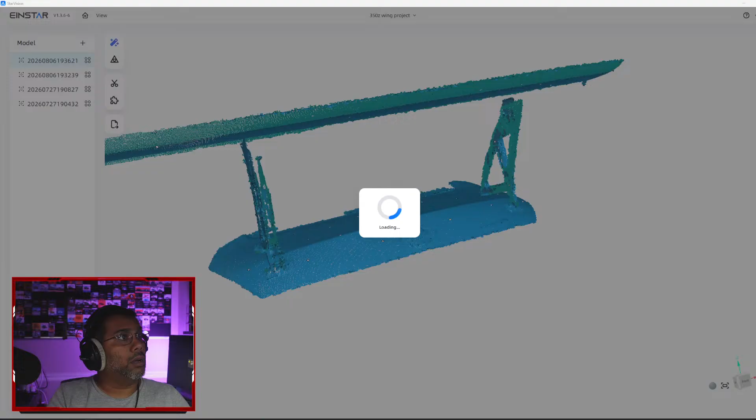I'm using a Wing Logic blade, so if you want to look that up in the meantime, let's see, Wing Logic, 71-inch blade for the 350. That's the blade I'll be using. And I did two of these scans in case one messed up. I don't really like this one because you see these double dots. Hopefully the software still took care of it well, and there's a shadow in here, but we'll see.

Let's just get rid of the parts we don't need right now. Totally messed that up, oh jeez. Last one is not good at the moment. Alright, let's clean all this up here. A little too deep, let's go back.

Jesus. Alright, nice and flat, there we go. Save that. I saw some cloud points on the corner there, I gotta drop that off.

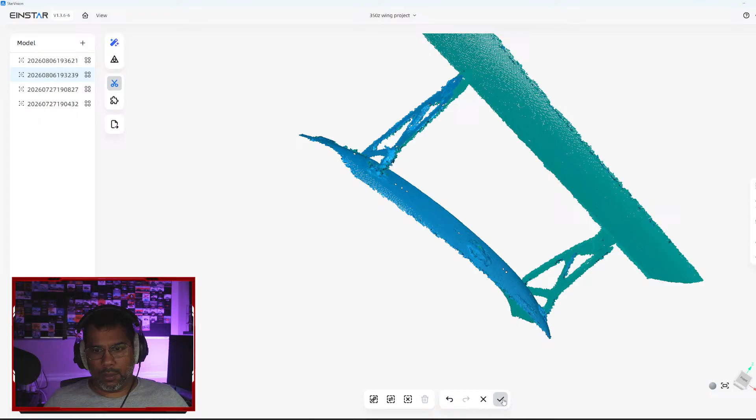Heck, I thought I got that thing from the bottom. I guess I didn't, oh the scrolling system in this, I gotta get accustomed to it. It's not like Fusion. Cut that out, cut that out. Let's save that.

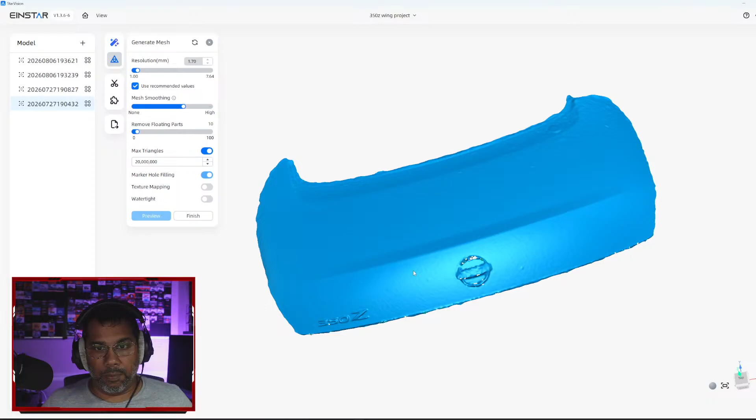Okay so this resolution, let's preview this. So what the scanner does is clouds and then from that you generate your mesh. So you see before it was very pixelated and holes and stuff like that. So now we have a little hatch, a little bit of geometry. I think we could fill some holes here. I mean, marker hole filling is there.

I think the processing is kind of dumb, actually. I really don't need that right now, so I don't care. Let's just finish this one and export it.

Let's preview. It's so much work, but that's the time you can take, so it definitely helps having you guys come hang out. There we go, here's under. That's not bad at all.

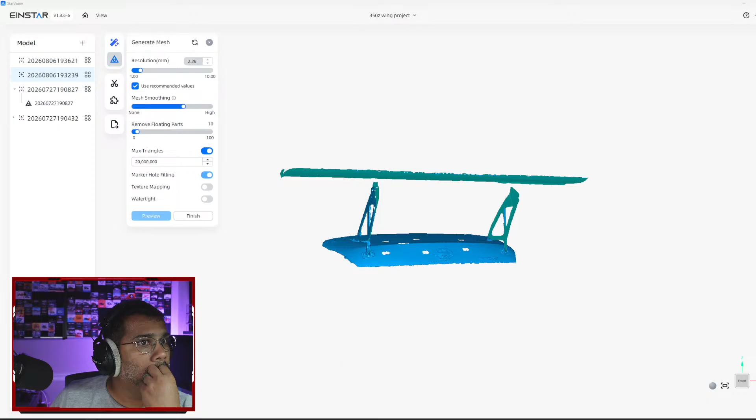We just need this really for the wing placement. So we have our other hatch that's clean, let's go ahead and finish that and export this guy also. This would be wing 1. Alright, let's export this one.

How's the drip? Have you done any events or anything yet?

You can see the scan messed up and skipped here. I just really want this for the placement of the wing, but I need to start processing these models inside of the scanner. This is kind of limited.

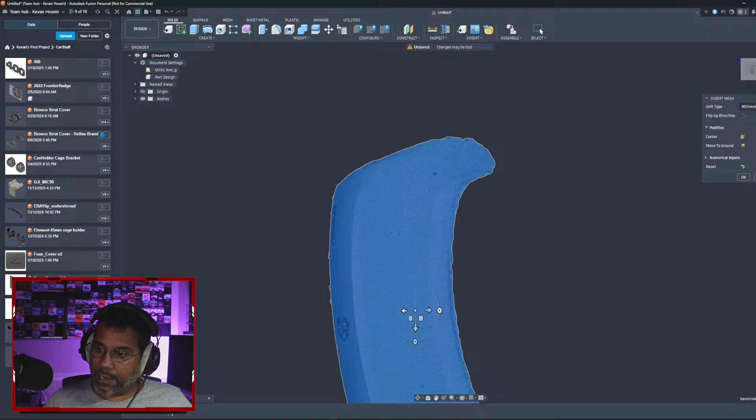Got someone on your ear. I heard the question but it lagged out a bit. Oh, you're outside, okay. Someone on my ear, what the heck, got me tripping on there. Is there somebody behind my ass?

No, I'm just asking if you went to your first event, your first drag event yet. Not drag, sorry, drift event.

Trying to get this oriented. It's gonna be a pain in the butt to get this nice and neat. Then we gotta roll this way. Okay, I think we'll just start with that for now, and then after we use some tools to get it.

So now we have a nice hatch, a nice scan, and we're gonna use this to design our pylons. Now let me get the underside and see. Oh, actually, no.

We're supposed to be able to align these two in here, right? Align, there we go, align this. It's not doing that. Do I need to select both of them?

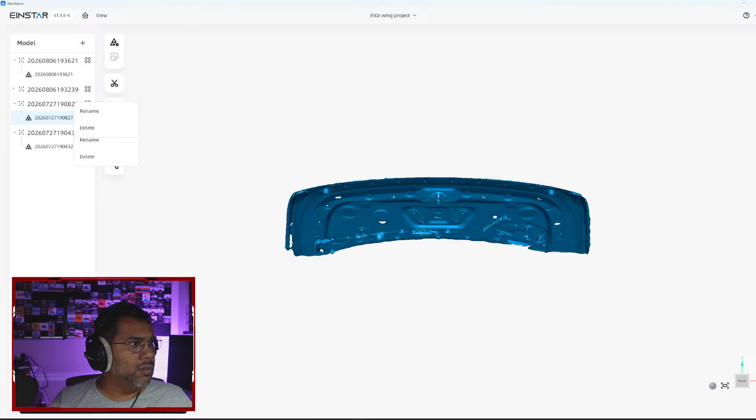Okay, open your workspace, load the two scan files into the model list. Select alignment, choose auto feature, let the software match overlap surfaces. Manual alignment.

Shift plus left click to pick at least 3. That's what I tried, shift left, it's only showing 2. Fudge, this overbearing thing, let's close and go back in.

Because I want to use the bottom geometry to actually create our bolt points for the wing, so I have to combine these two meshes. Right, but where is it going to let me?

That's balls, man. It said hold shift, but holding shift is not letting me select 2 models to align. What the junk?

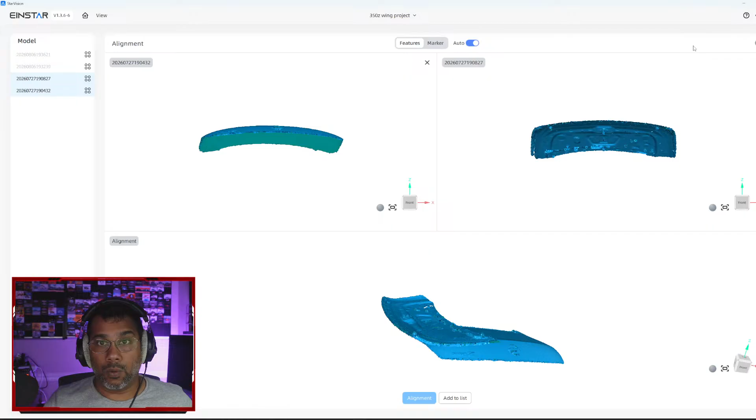Where the heck are you gonna make me undo? Okay, so we just unselect and reselect the 2 models. I may have to take off auto, and select 3 common points. Right now I'm just going through some woes. This is show 2 models, at least 3 common markers.

I wish that auto feature worked. Features. Select at least 3 common points. Do a right click, a center click, a left click, control click. There we go, shift click. So that corner there, that corner there.

Because this is the underside. Can I just do that there? And then on the top of the hatch, let's do here. Oh, nope, we gotta do... Can I remove that? Can't control Z that? Son of a bitch. 2. And then 3. Alignment. Fuck!

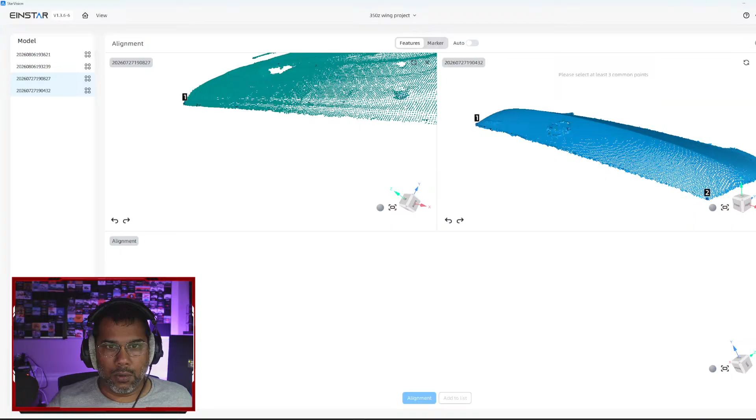Let's try this alignment again. So, see, this is underneath software. Corner 1, 1, 2, 2. Where would be a third point? Because we need to get it - the third point, we can't touch exactly.

Wait, no way, you're the oil funnel guy. What are you? Bro, you know I am. Are you talking about because I just... Yeah, because that stuff I could design from a sketch, a model. But this whole 3D scanning and retrofitting and making your own parts, man, it's a whole other beast, my dude. Whole other beast that I'm trying to figure out, you know?

Well, let's just do middle here. Then, yeah, the funnel stuff, I was able to do that. I've been 3D modeling that for years, and I'm able to do that. But this stuff is just so much.

Oh my gosh, see? So it's trying to merge the 2 points together where this underskin is much lower. Now the corner is pretty close, but you can see here where the 2 scans kind of merge into one. I think I'm just going to have to do this alignment in Fusion. Sucks. Shucks.

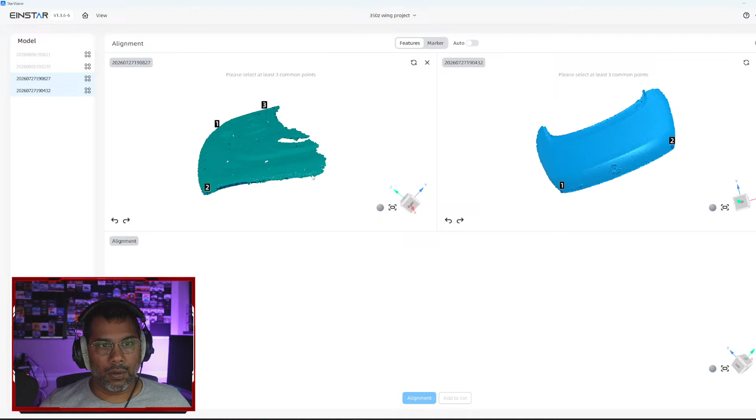Unless I have an idea. I have an idea, I have an idea. Let's see if it's big brain. So we go 1, 1, 2, 2, on the edge 3, 4. So edge around here, 3, 4. Please work.

It's closer, but we still have some overlapping, and the problem we're gonna have - see, yeah, this is underneath the skin, it's higher than the trunk lid. But oh, you're gonna be a pain in the butt.

You think so? I mean, what's sucky is that it's doing the cloud points instead of the generated mesh. Is it doing the mesh? No, it's doing the cloud points instead of the generated mesh. I would like to have it actually try to align the mesh instead of the cloud points.

Oh, on the other side of the hatch? Try to spray as much as possible, like in the scan. Let's just go into Fusion. So we have our hatch here. Let's insert and see if we just might have to do it in Fusion on the trunk. Yeah, we might just have to do it inside Fusion and align it that way.

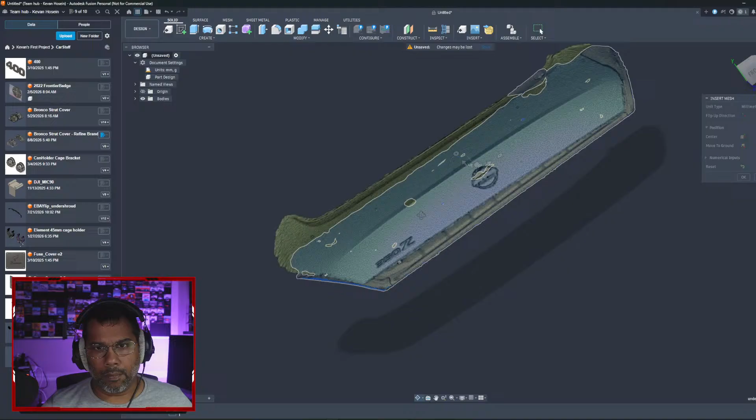Nope, that's too much. So, what software do you use for work? Just get it close and then we'll just try to snap, if that's even possible.

I mean, I think that's a lot better than where we were. Oh, where's the degrees? Too far. Let's go closer so we can move. Nope, it's snapping too damn much. Okay, okay. Let's just drop it there.

Yeah, Fusion seemed to be the way to try and get it done. Problem is, I think I should really first get the bigger trunk aligned by our coordinates. So this is the next... where's it at? MCARP, if you're still there, this is the next biggest hurdle, trying to get this.

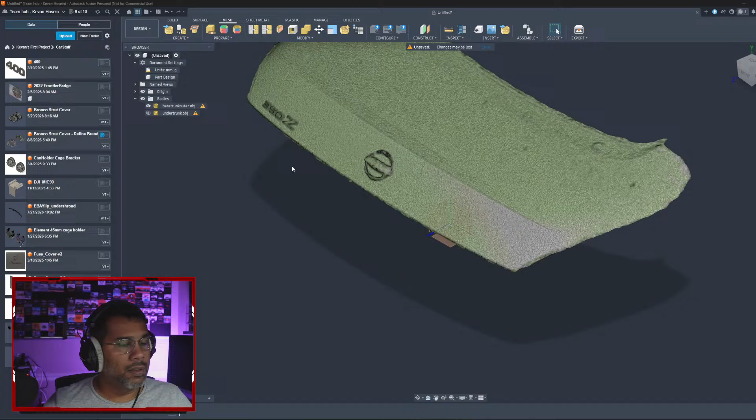Okay, so now how I'm going to try and get the hatch aligned to our coordinate system is we're going to have to create some planes. And not the flying kind. How do we do this again? We direct edit, select this body, and then we construct a plane from 3 points.

So let's try and find 3 nice points on here. In the middle, that corner there, that corner there. So that creates this plane.

And with this plane, we could go to align. Well, no, let's get some more planes. So that's the flat plane, so let's take this plane. Nope, not that style. And I want a perpendicular plane. So good. So now we have a perpendicular plane on the middle.

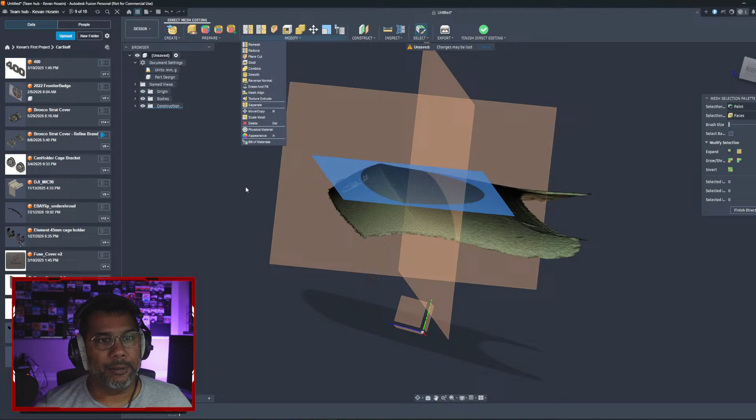Stepper 2 servo, man, I'm telling you, it's awesome. But when you start modeling it is a pain in the butt. It's like there's so much growing pain. And that's what I'm kind of going through right now. I could, like my last project. So let me show you all some stuff, do a little show and tell.

My last project is this, right? This is on my Bronco video. I had a friend that had a Bronco, and it's a Gen 1 body on a 6th gen chassis. And the 6th gen chassis has a huge strut tower, so it kind of protruded. Drift Pappy, don't look at my timeline. It is gross. You professional CADder, you.

So here is the scan. Let me hide the body. The actual design. What the hell is this coming from? Oh, up here. Damn. Okay. So we started with a scan.

I took the scan and I found, basically drew a matching, what you call it? Oh, man. So like, I did intersects and I kind of drew and traced. It's the big one, damn it. Oh, my timeline is so jacked right now. But anyway, I did like a cross section and I created a right angle to fit this. I'm just butchering it.

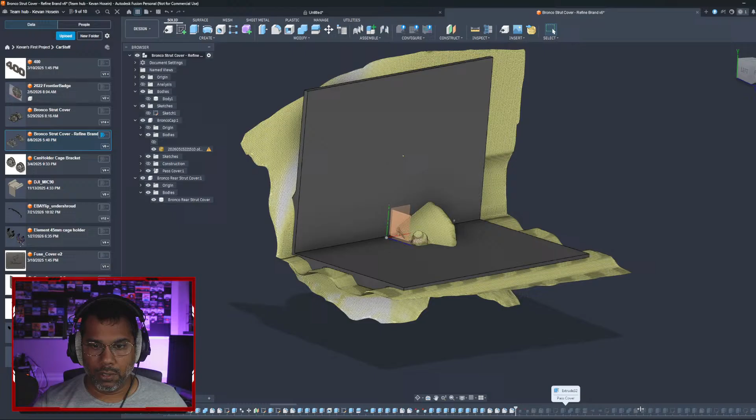Had it fast forward some more, blah, blah, blah. Come on, history. I guess it'll drag. Nothing too long. Drag. Jesus, this timeline is so messy. There's no other shapes. Oh my god, I went so far back. Went too far forward now.

So then the main body, I just did a plain shape like that. The inside was cut with a ball. I kind of skipped that. I'm butchering this. I'm butchering this. God damn it. Fine, not a good example.

But so out of simple bodies and simple objects, I was able to interact with each other and create different sections. So I created the section to actually interface with the physical scan. And then I created like a square block body to actually be the whole thing. And then on the inside, to create a relief for the strut tower, I created an egg shape. And then what I started to do was subtracting from each other. So I subtracted the egg shape from the wall, the L shape, and then from the block. And that gave me the relief I needed to clear the strut.

And then from there, I just started manipulating the body and stuff like that. So I was able to come up with this shape and printed it. It was like 20 hours to print the damn thing. Burn out with that timeline. Yes, the timeline is a damn mess. Holy shit.

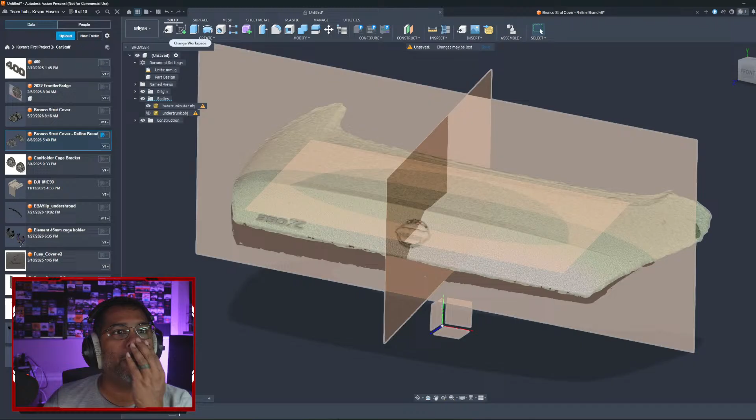An option in the menu. I'm forgetting it. Oh, there's always that gotcha. Right click. Up here, right click. There is some option I have to toggle. Oh, I think I have to create a component first, and then I think that's what it is.

Doing the Bronco project was a great learning experience. I guess I could show you the eBay shroud - the video I just put out on the shroud I did. This was a simple one, really easy, and this was the lip inside the bumper.

So I started with the lip. This is the inside of the bumper lip where you screw the plastic on the shroud to. And I needed to create the standoffs to bolt the CNC cut one-piece under shroud to. So I used this and I created sketches.

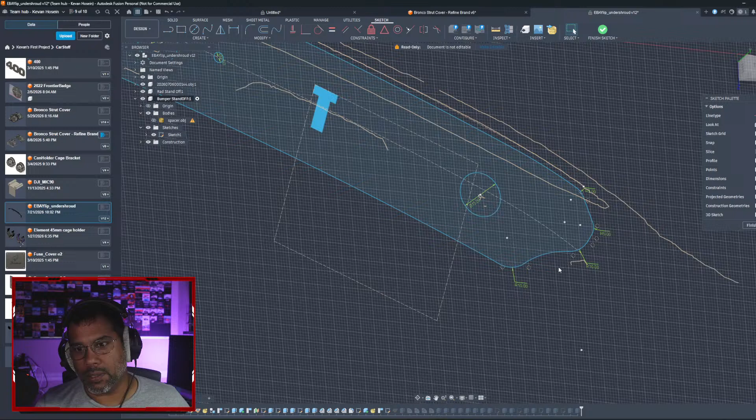And I broke them up into parts so it'll be easy to print and fit in the printer. After I was able to do that, I was able to extrude each sketch into the actual body itself. So each of these sketches I extruded into the body, and these gray parts actually were printed and became actual things. And you would see in my video that I actually used that for standoffs.

Do I have pictures? I think I have a picture I could just quickly drag and show you guys. I have no idea what I'm mumbling because this is the first time hearing this music. Where are you?

Oh yeah, but here's a photo while I'm digging through photos - the 3D part in the Bronco, and that's the hole that was there. And that's the console cover that I came up with. I know I have a picture somewhere of these standoffs. I guess you know it.

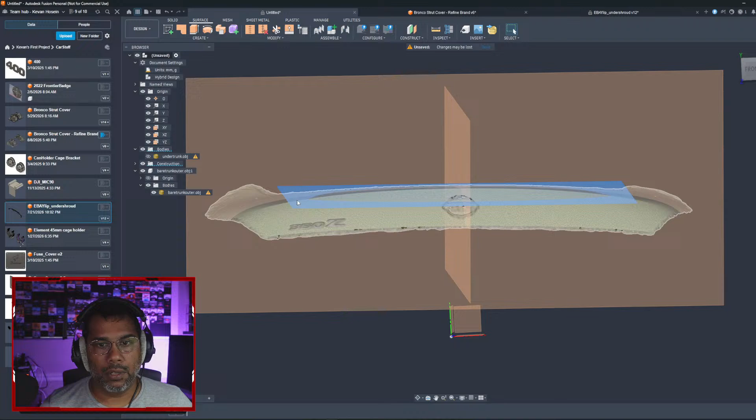I guess we have to do that origin in the component there. So it aligned. Dude, it freaking moved. Cancel. We have here - a line from here to here. No, we need this origin - not the original origin, this origin.

But it's only pulling down my planes I created. I've done this before, I just don't remember, and I don't know if I need to jump on that stupid YouTube. We don't need to ground from parent, we need to unground it. Okay, from scratch.

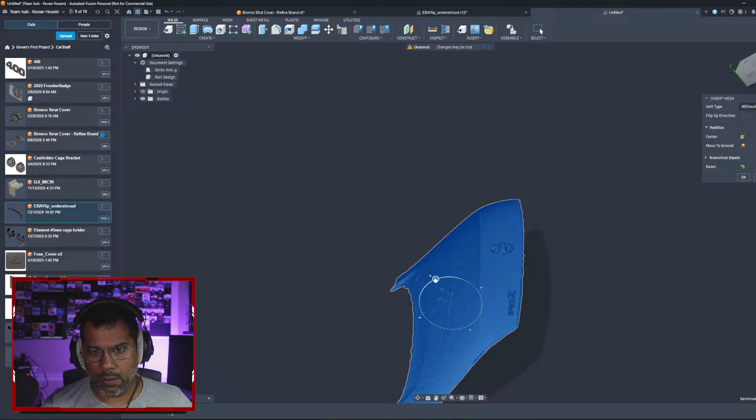I was thinking I needed to do this off camera and save you guys the pain, but we're all learning here - we're all learning to mess with meshes. We're messing with meshes. So top, we want that to be a little right there. Let's go back to top. We're gonna need to rotate him a little bit.

Sometimes if you zoom in more, you get a little more granular turn, but not in this case, apparently.

That came out beautifully. The Bronco thing, man, that was a rewarding project. Very rewarding. Every project I do, I kind of learn from it, and that was definitely one of them.

So we change this to hybrid, convert. Then we create our component from this body, right? Then we unground. Beautiful. Let's go to mesh. We direct edit the mesh. No, we don't do that. We want to create a plane after we do direct edit. 3 points, there we go.

Let's do here, here, here. So we want this to be our level. All right, so we have that one.

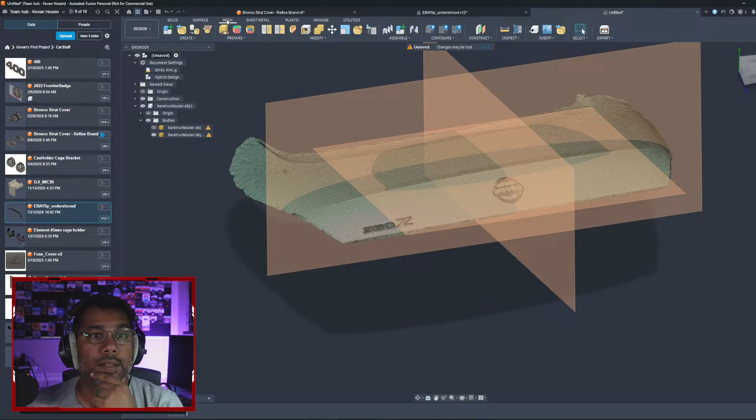Oh, so look, it created this secondary one that's edited. So now if we go back to solid, we go here, align there to...

There's something I'm missing. I'm sorry that I am making this annoying.

Let's see, what's my history? Where's my history? I need to find, there's some stupid freaking option that I am forgetting. 100%.

But like I say, guys, thanks for just joining on and struggling with me. Hopefully, if I could get into the actual designing phase, it would be a lot faster and smoother.

Just trying to figure out how to, because if I don't align these into the XYZ coordinates, my drawing and sketching will be really off. I need to get this hatch in a good position.

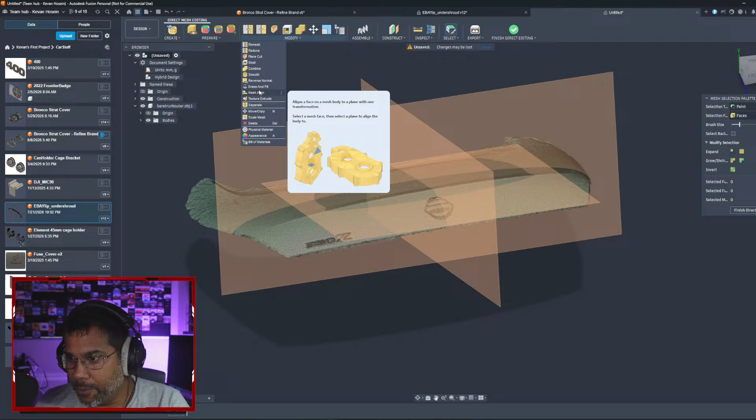You're enjoying the pain. I love it. I'm just freaking cold sweating here right now with performance anxiety trying to do this in front of y'all.

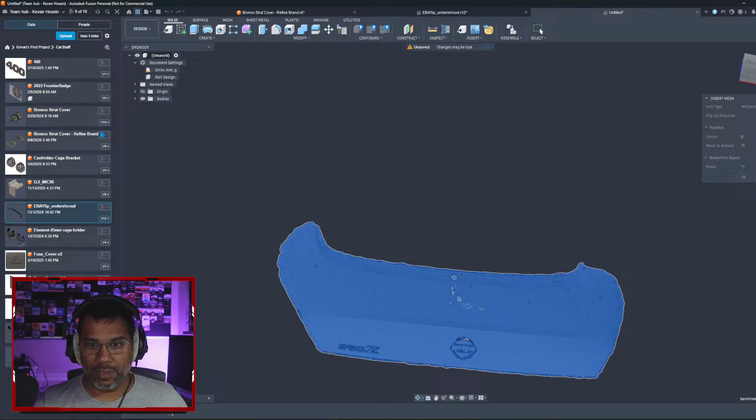Oh jeez, oh jeez, the performance anxiety. Definitely, yeah. I can't believe I forgot to hit the radio button to select it because it was just moving the parts for that. Golly.

Where's that? Yeah, here it is. So you want a 90. And go real close and rotate it a little bit. I mean, we don't really have to do this if we're going to align the damn thing.

Okay, so now we have our body. We need to change to hybrid so we could create our components. Now we create a whole new component for this guy, and we select the radio button to work within this component. Then we go to direct edit. Kind of get all top there. Oh, now we pick our points.

No, let's try 3 different other places. Let's do the middle of the hatch here. Okay, and we have our first point. 3 points. No, perpendicular point.

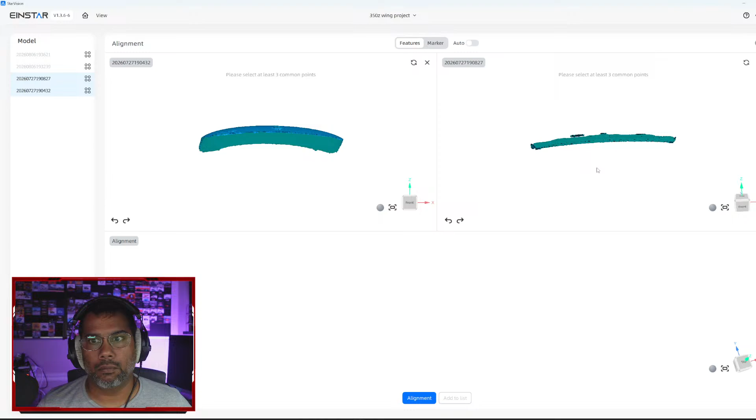That might actually be helpful, because we tried to mess with our alignment here too, because I want to combine 2 meshes, this and these 2, but that's a whole other story, I guess.

Why? Come on, this has to be how to do it now. No alignment suggested by geometry could be found. What are you talking about? We don't have any bodies. It's just this, I swear I've done this before. It doesn't want to work. Why? Why? Just banging my head.

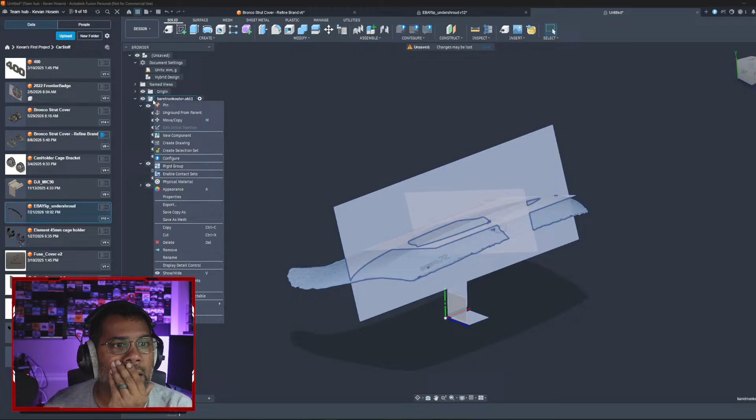Oh, I'm grounded. Unground from parent.

I pulled a muscle, I pulled a muscle. I pulled a muscle, oof. But we did it, we did it boys. We did it boys, we did it boys. Jesus Christ.

Oh shit, that was a pain in the ass. Okay, I need to see. Where's the origin? Okay, so we have flat there.

Now we need to align this vertical vertex to this here. Alright, so now modify, align, and we come to, it's right here, it's very faint. There, alright, so now that should be lined that way. And then we align this portion.

Okay, this one guys, I'm uncertain about, right? So this is capture or revert positions. I don't think we should revert, we should capture, right? Because we're moving stuff. So we capture the position.

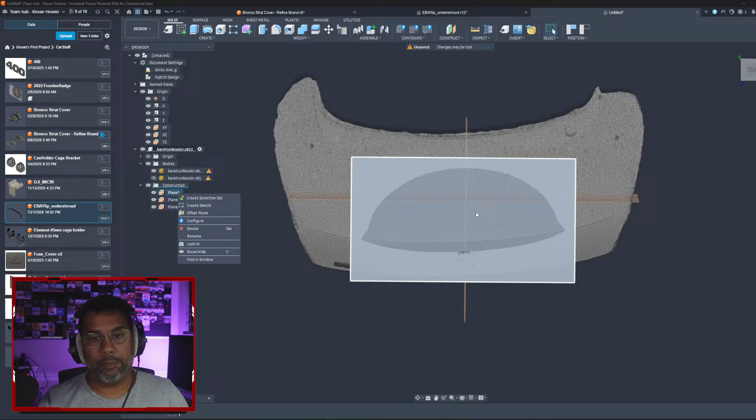Right, so eventually I am going to do scan, CAD, send, and send them the pylon design, the swan neck pylon design. But I want to create a fat, thick base plate, because some base plates with the downforce of the wing, it actually deforms the hatch. So that's why I'm going through all this pain in the buttery to create a nice flat base, wing plate base.

But yes, it's very pain in the butt. I mean, I'm sure after I do it so many times, fucking A, after I do it so many times I am going to be able to do it a lot faster. Because everything's like growing pains, you know?

I might have to do that cloud. I need to write it down. Cloud compare.

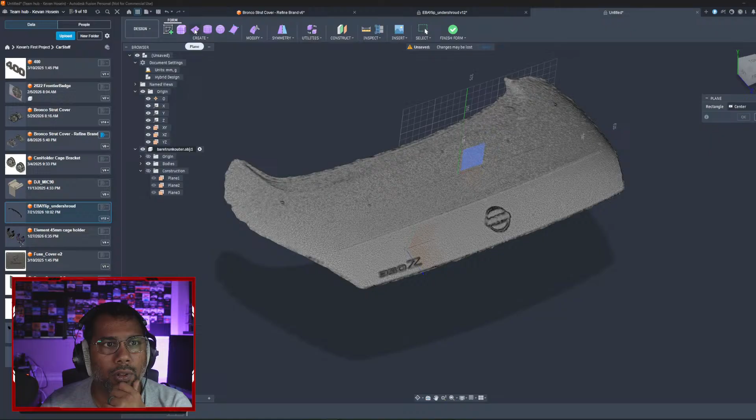I don't want one off of a plane. I want one off of a face. Edge. Object snap.

Okay, I'll go back. Let me go back. Finish form, so like here, right? Edit feature. Now I'll just edit in the feature.

Yeah, I don't know if the free version will let you do it. It just gives me this. Forms is the worst, I mean, you gotta get it right. Let's go back into forms.

Gosh, just give me a damn protractor and my old trusty DigiKey ruler and a caliper. Good lord, why do we torture ourselves like this?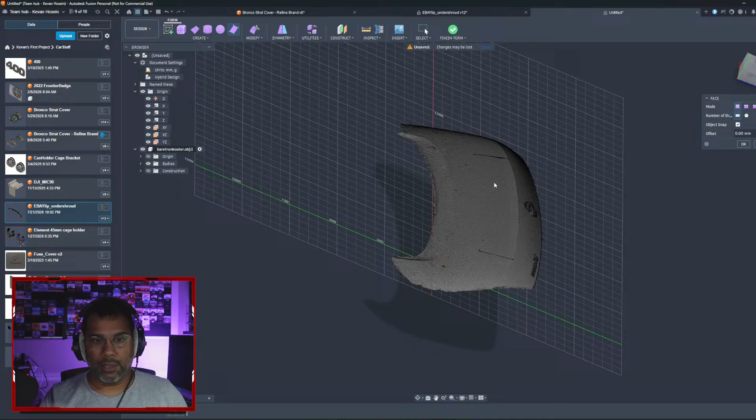So now we have our first form. And modify, let's subdivide it. See, object snap. This point? No, you have to just subdivide it first. Okay.

So now, I think it's Control or Shift. Oh, right click. And we move. See? No, we just want to move. We don't want to move the whole body.

We want to move. Is it Shift or is it Control? There we go, move that point. Why did you?

You want to select the form, select a point. Edit form. Edit form. Ah! Boing, boing, boing, boing.

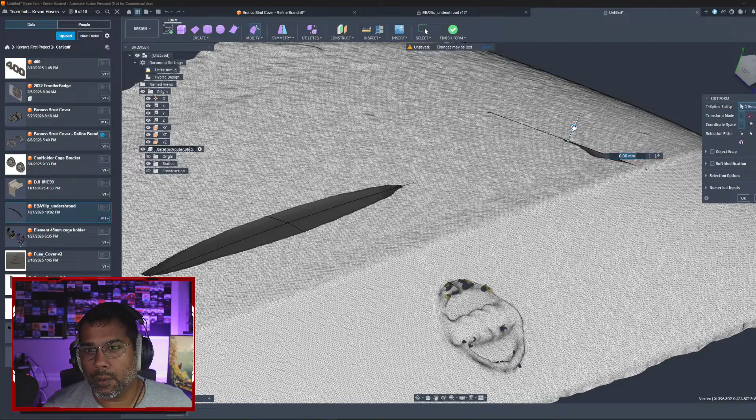This is what I want. It's a little too high, so let's just drop it down a little bit on the body. Yeah.

This corner here, edit form. Nice. So we will pull it down a little bit and define it more. Nice.

Okay, so now we want a subdivide. No. Want just a subdivide here. Okay, and then here we want another subdivision.

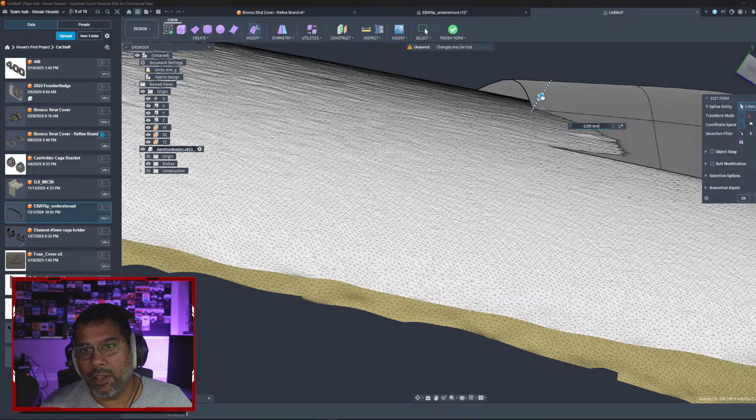No more subdivide, I want to edit form. All right, okay, this guy, edit form. I may have to subdivide again because you see that shallow point. But slow but steady, guys, slow but steady.

It's fun when it starts to work out. But when you're in the struggle bus and you have people watching you struggle, it's a pain in the arse.

But this is awesome, and we're actually making progress now. Getting the actual skin off the trunk. Because the underside is really there, so I will know where I want to drill. Because the underside of the hatch, I want to make sure I drill and place my bolts and washers into a very strong spot.

Okay, yeah, we definitely have to create more subdivided parts. It's so time consuming. Let's get here down. Just do this a little faster for you guys.

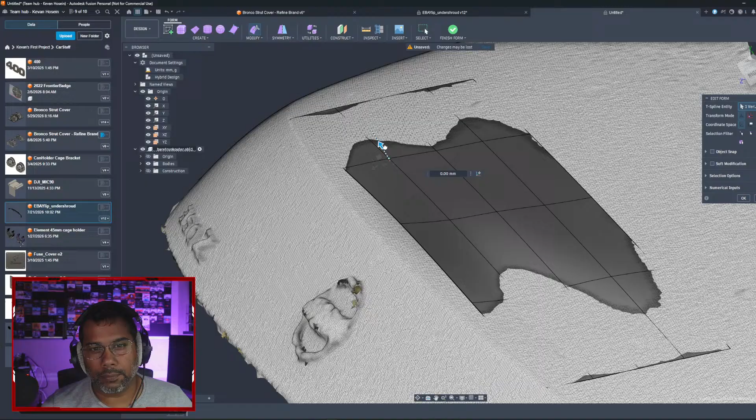All right, let's hit OK here, grab these parts of the form, and add a subdivision here. I don't want it lengthways, so nope, I want it that way, but I don't want these. Yep, there we go.

Should be able to right click and choose repeat, right guys? Repeat subdivision. Oh yeah, but it didn't really take the menu. So there, snap-a-doo-doo, doo-doo-doo. Now we go back to edit form.

Let's do this point. Oh, you know what? Freaking object snap this bad boy. Beautiful. Object snap, ah, I forgot all about that option, guys. Look at that. Oh, and now it's snapping towards the mesh.

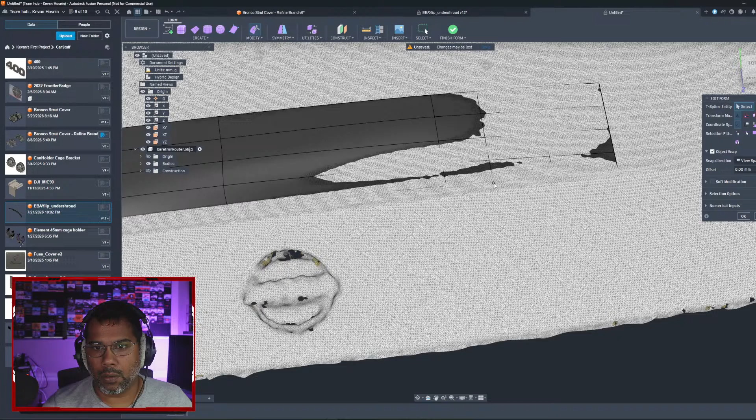I have to do a little flip on the end at where the trunk naturally kind of tapers up. I think I need to subdivide these sections just a little more. Yep, like that. Yep.

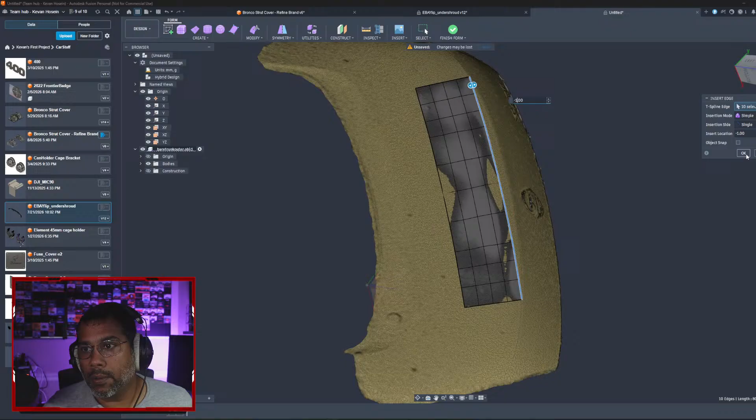I mean, that's what, 1 millimeter? Can we do minus 1 millimeter? We cannot. There's a way to drag the edge, isn't there? I mean, there was a way, man. Just drag it yourself.

There's an option somewhere. Single, simple, just try exact. No, it wouldn't let me do it, out of extend. Why won't you let me extend? I mean, I'm not trying to go that far back.

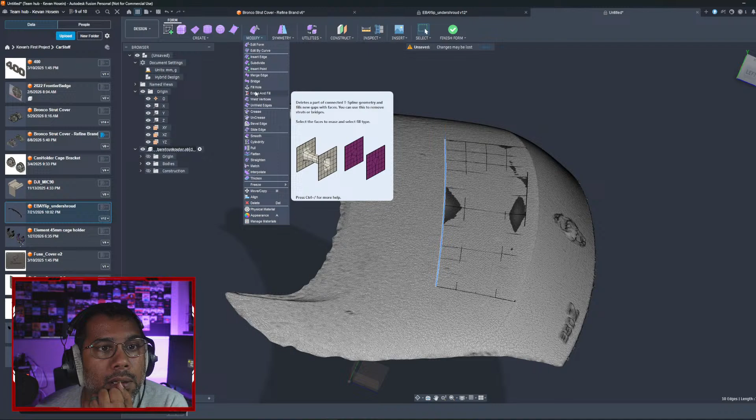Uncrease, unweld, bridge, merge edge, aligns the edge to second edge. Pull. Is it pull?

Just edit the form, so we want to edit the whole form. Take off object snap. Hold Alt and drag. Nope. Shift drag. Nope. Alt drag. Oh, click the edge. Right click.

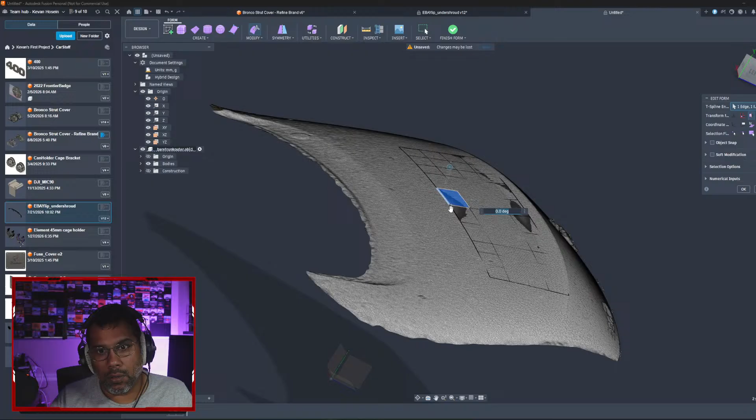That's what I was trying to believe. Alt. It's not doing it. It's not doing it. So we just edit form. Yeah, that's what I'm trying to do. I'm holding Alt to drag, but it's being...

Because that's like what I saw him do. He double clicked. Edit form. Hold Alt. Drag. No. Soft modification is just that. Alt and drag.

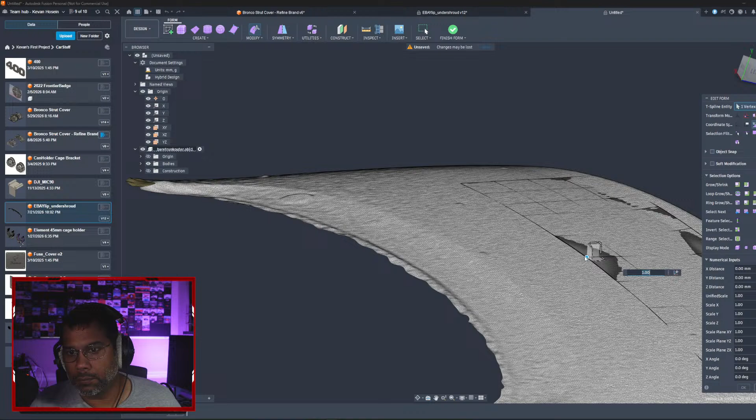I don't want to change degrees. Man. Rotation selected, I don't want rotation selected. Scale handles. Bro! No, that's just scaled that existing line.

Why is this being a pain in the butt? Try selection filter and turn it to an edge. I don't know what that is.

Yeah, there's some. I wonder if it's because I've had it snap to the body. That's what's kind of not letting me drag the form. Because yeah, you're supposed to normally just be able to drag the form.

Okay, but I guess, you know what? Let's push on. Because yes it would be nice, but that's just much bigger than I don't think. Now I need to figure out what. There we go. That's what I needed. An object snap. Okay.

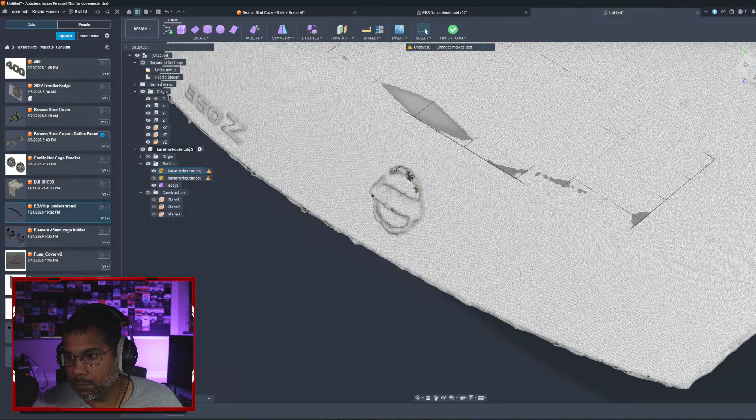What do you mean body, not mesh? So this technically, now if I go finish form and take that off. So it needs more time, but this is pretty much the trunk. Now if you look at here, inspect, that is 162 millimeters. What's 6 inches?

Man, I thought I was doing that. Modify. Alt. Nope, that's scaling.

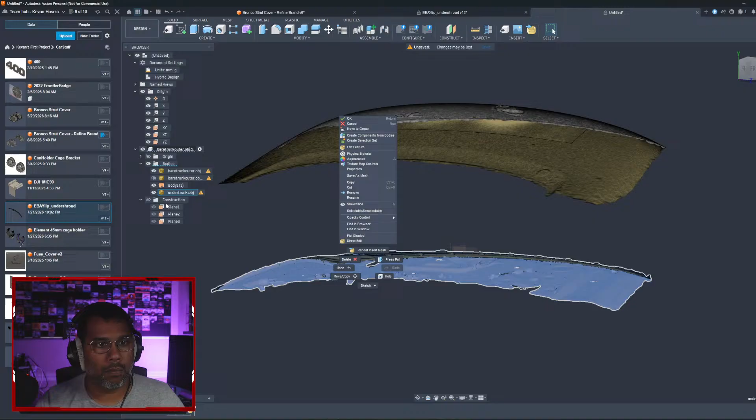So now that we have the mesh and I have the underbody here, my thought process was to get these edges aligned and use the holes on the bottom underside to help me come up with drill points for this. Right? That's a big brain move, right?

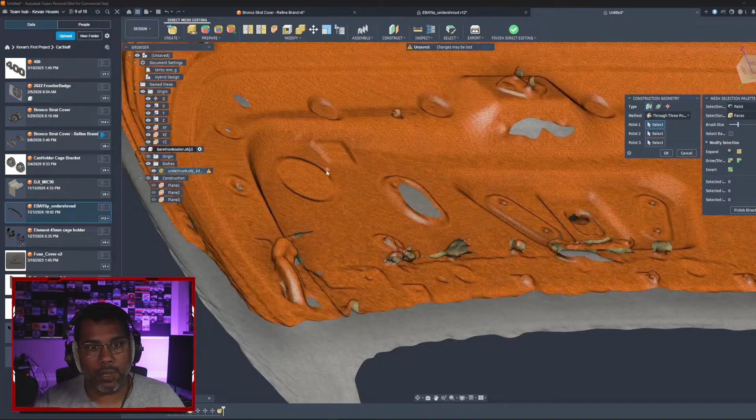But with the bottom, I could technically look at here. So this is a nice flat plane, right? So in here, I can go into mesh, direct edit, and through 3 points, 1, 2, 3, it's not visible. The object you can... oh, okay. So I have that turned off, right? So now I have here, and this is what I could do.

So from here, we want to create a sketch, and I will create a circle. Now circle, move it in place. Oh no, it's not letting me drag it. But we have our circle on that face.

And the thought process is from that circle that's flat against that body. It's a huge mounting point. I could cut a disc so I could CNC cut a disc, but let's go ahead and put a smaller circle in there also. Where's sketches? Edit. M6, 6mm. Let's do a 7mm hole.

And from there I can extrude. That would show me on the hood. Bro, I hate when it freaking does that to the damn hood. So look, so that shows me on my form a bolt location of where I could drill. And that's going to be a nice strong point on the hatch.

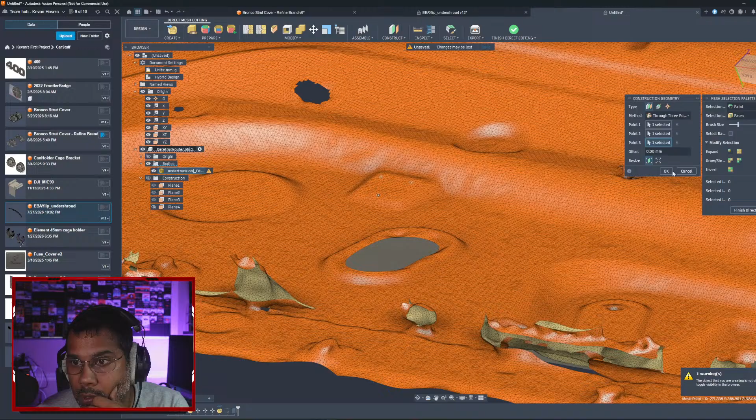Alright, so now let's hide all these other planes. Alright, so now we have our little plane, so finish direct editing. We will go into here, create a sketch on that little section there. Hide that too. Oh no, I need to figure out my rectangle. So we go rectangle, and then we choose this 3-point rectangle from here, here, and then here. We have a rectangle.

That's not on my construction plane. Kill that sketch. So that plane here. There we go, that's what I want to see. Go back in there, on here. Sketch is all wrong, I need to undo that sketch. Okay, let's start that over.

So here, create the sketch. Go back in. And, okay, so we end there. Now we trace our little rectangle. Beautiful. Why is it down there?

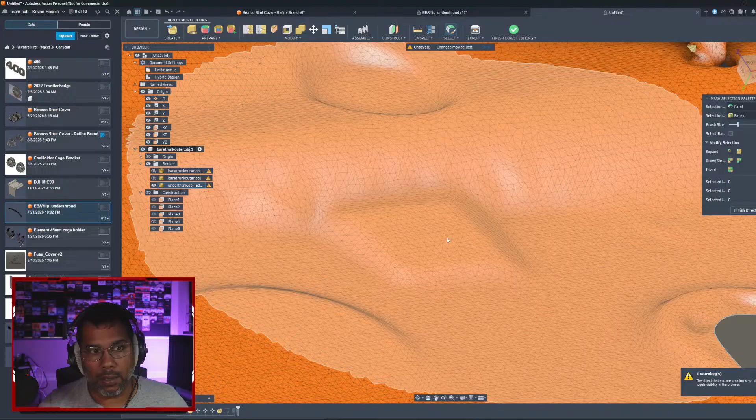We create a construction plane, 3 points. 1, 2, 3. Hit OK. Now if we show with a little construction point, alright, it shows right there. That's where I need it, right there on the object. Beautiful. So now we click there.

Finish direct editing, go back to the plane, hit sketch. So now, yes, I don't know what the hell happened there. Now we could trace it and it'll be here. Finish sketch. Why did it put it down there? Again, I want the sketch on this part. I mean, it's still giving me where I want it to go. You see the sketch is down there for some reason.

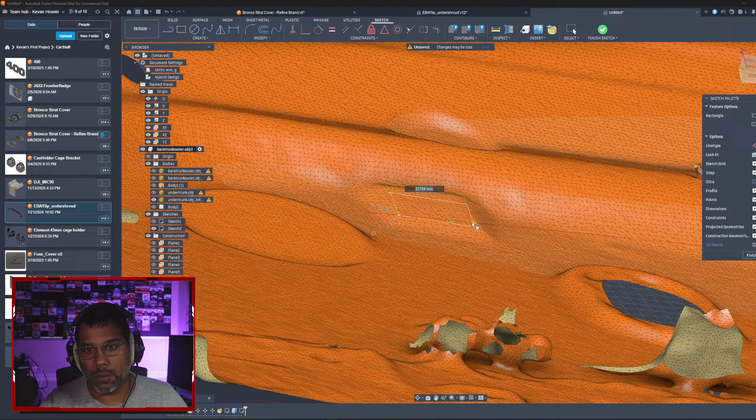I think that was the problem too, is just snapping. 1, 2. I have my points correct. It's an ugly square, or an ugly rectangle.

Beautiful, that is on the mesh that I want. Now we can finish that. Hide that bad boy. Edit there.

From the middle, right? Drag him there. From the middle, drag him here. Put a 7mm. I said 7, why did I say 4? Because I hit 4 instead of 7. And then we can show this guy, show this guy, show this guy. Beautiful, that's on the part. Extrude.

So technically, that is 2 reinforced places on the hatch that I could work off and drill in and put a bracket on the bottom here to reinforce it. What do you guys think?

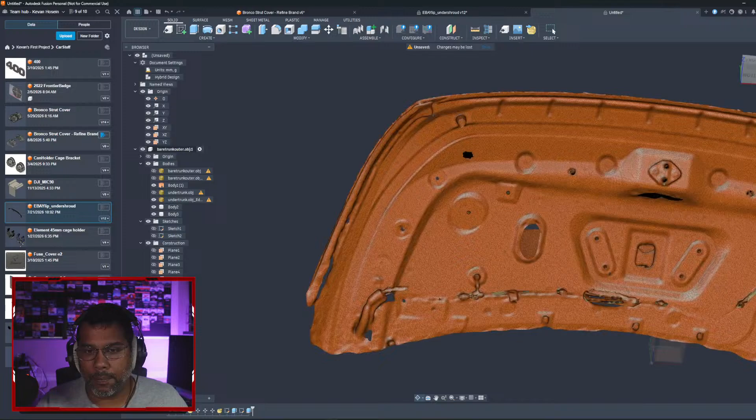I do kind of think I want to do a third. What do you guys think? The thing is, this geometry is all different too, and I'll have to 3D print this in plastic and try them out, but drilling is permanent.

Do I want to go to here? But the question is, is that too far back in the hatch curve? That might be up high in the hatch curve, which I kind of got. Why does it do that? I think I need to reduce triangles.

Nope, opacity didn't work.

Third hole. Do you know why it does this after you edit so many times? It just throws those scans into this dark triangle mode. Should I just try to reduce the facets and see if that'll go away? If I go to direct edit.

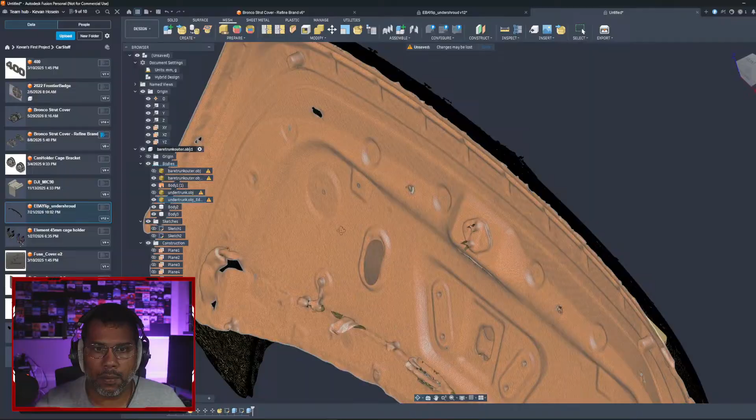You see, if this hole here was symmetrical to this side, definitely we could probably utilize that. Thing is, if we utilize a point like this here, that's just going to have to create such a big plate on the top of the hatch.

I think we just create a point here. We may have to mill, yeah, just create a point here and mill an adapter that fits flush over here. I think that's what we have to do. We may have to just extend.

This whole geometry, so we have 2 stable points and a third. So instead of, and then surface model this small little spot, what do you think?

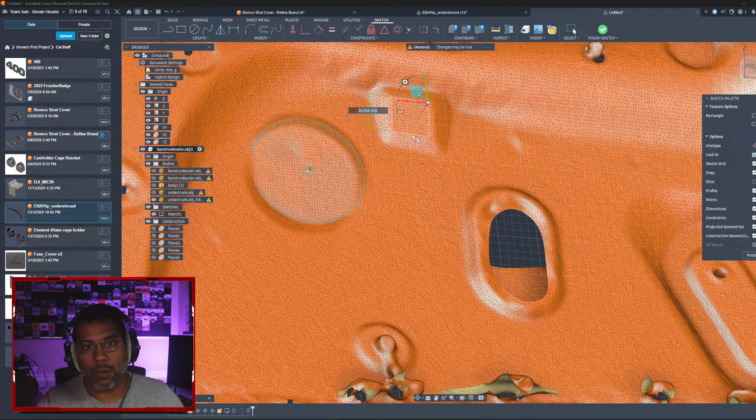So yeah, we're going to do a bottom plate and a top plate. We're overcomplicating the shit out of this, guys. Yeah, yeah, shit. Okay, let's... are we not still? No, let's go back in the sketch.

So let's go ahead and throw some dimensions on this. 26. And then it's too off, I don't like that. It's bothering me. I hate to say OCD because I'm non-diagnosed, and I notice people diagnosed with OCD. Fudge.

Okay, that's a little better. All right, so we have that sketch there. And what we could do, I don't know why I got out of the sketch. That is a little high. It's not on the same plane. But we can work on that.

I could create another surface model off here. But basically, what I'm thinking is we have that there, and then we create another triangle, another rectangle down here.

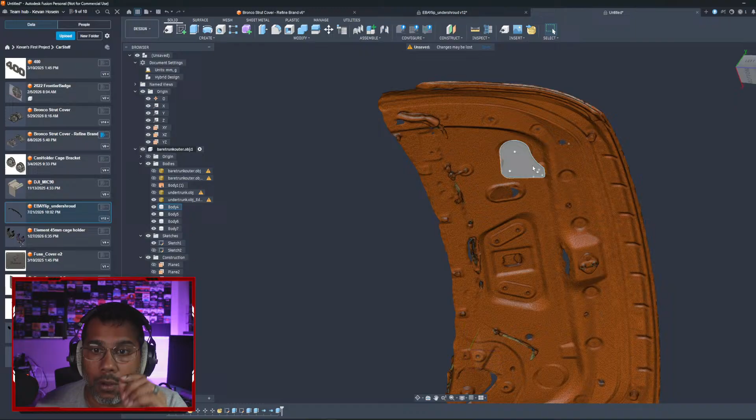That's going to sandwich crease bent metal. This actually needs to come in some to get around that. So we go here, we edit our sketch. Not that sketch, this sketch. And this.

Let's just do that, quick and dirty. We'll come back and make it nice and more better. So just reduce the ends a little bit. Finish. There we go.

So we have our under plate that I'll have to surface model after. So this probably would be, or just do a flat plate, really. Do we have to go to the expense of CNC cutting something like this?

Drift Papi, let me know what you think. Do we CNC cut this? Mill this, sorry, CNC mill this, or we just do a flat plate? Because this will lie flat on that edge, that edge, that edge, and our 3 bolts could come through here.

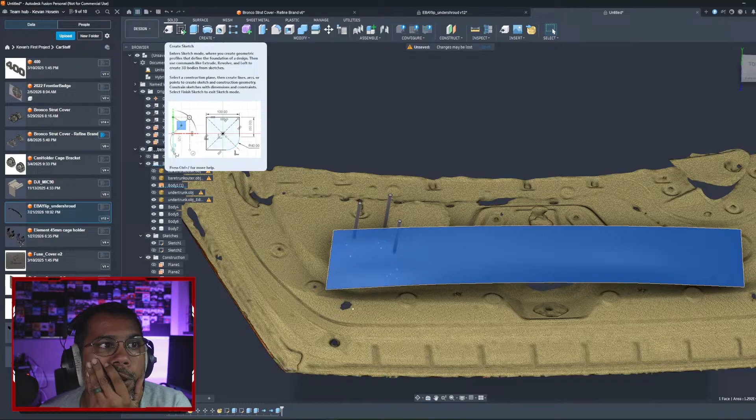But okay, so let's close it out. And let's do a quick dirty before we get in the stream. So off this face, we need not that, so undo that blank sketch. This will probably definitely need to be milled, but so from here, create a flat plane.

Let's get out of alignment. Let's go home. Look at this big old wing on this hatch. So look at the wing to hatch, right? So that's a lot of downforce. I freaking hate the model is skewed like that.

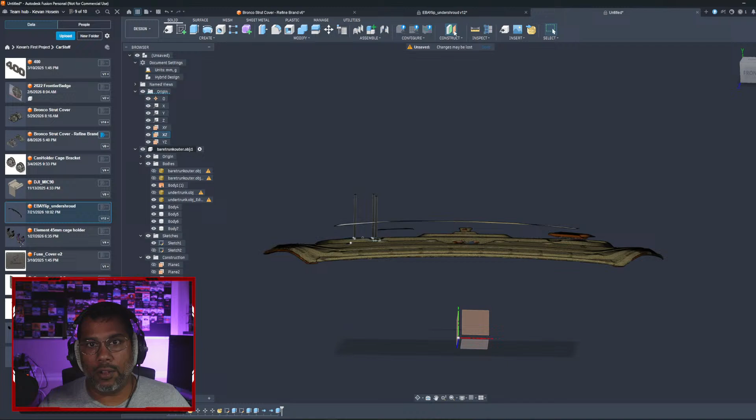So now here we could have a tangent. So where is my origin? So here's my origin. Remember, at the beginning of the stream, we oriented our object so it should be flat. Should. So then I'll create an offset plane, right? And we're going to do it to the top here. Can we do it to the top here?

Nope. Man, that's bent as hell. We're not going with that origin. Hide that one. We're going with this one, right? Is the flat one? Son of a biscuit. That's off too.

Okay. Future Kevan is now. Back at the beginning of the stream when we said, yeah, it's just enough, I'm suffering from Future Kevan right now, from past Kevan. Killing Future Kevan.

So what I'm thinking, we'll just move off of this and create an offset plane. We'll come up here, right? So this offset plane will be a compression point, and then we have our form, which conforms to our car body.

I mean, we could technically, yeah, because that's a bad angle. See, that's a bad angle. It's flat, but that's a bad angle. Plane at 3 points is what I think we need.

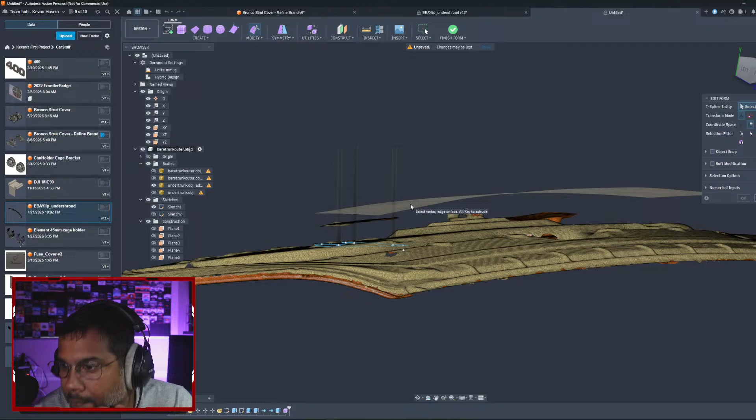It'd be kind of cool to have a flat. Oh, should I just curve this part also? There's a thicken. No. Let's get out of form. We have that matching our car body.

We just need to design a top plate now. Design a top plate. Okay, like I said, quick and dirty. So let me stop being a prima donna. Oh, look at all that. So that's a mid plate—nope, we're not doing mid plate.

So 3 points—oh, we have to add points. Oh, duh. Simple. Let's extrude this down till what we think would work fine.

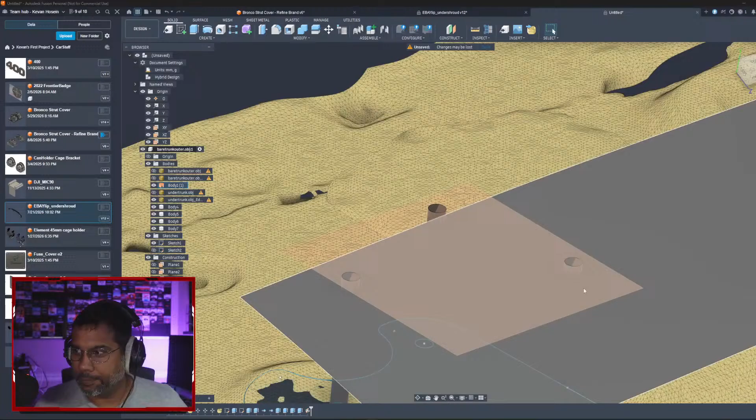Beautiful. So now I could do 3 points. Uno, dos, tres. Big brain, big brain, big brain. And from here, we have our quick and dirty sketch plane.

Alright, you can see it above there. And then let's hide all this junk so it doesn't snap. And make sure we're kind of... nope, change those two views. I derped it up. Okay, there it is. Edit. Okay.

Let's start with a square. Is it on our plane or did it snap? It snapped. Okay, so now hide that and that.

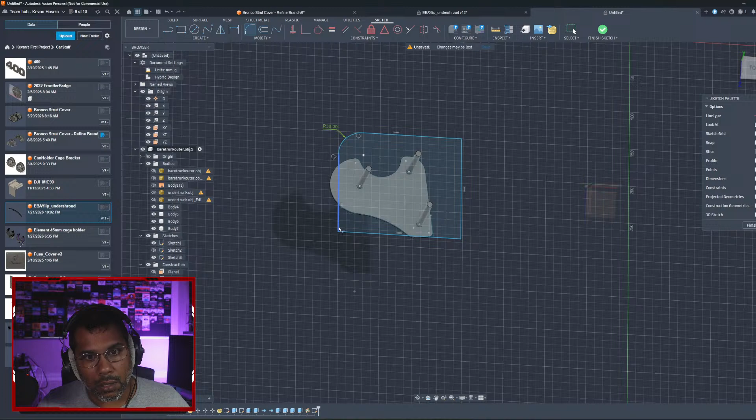I will have to really mess with this offline, but this is a good first draft, guys. What do you think? Huh?

This will be our top plate, right? So that'll be our top plate, and that was CNC off of here, and we'll model our form—this curve is our form that fits the 350Z hatch. And then from there, we build up.

So, for instance, it's trying to cut stuff. It's trying to cut—what are you trying to cut? The pylons? Yeah, all right. So here we have the top plate, and then we have to contour to the bottom. I'll do that later, but just with quickness.

How am I gonna do this? So we go back to the last plane, and we do a perpendicular plane. Beautiful. So we're gonna put the pylon right in the middle here, right?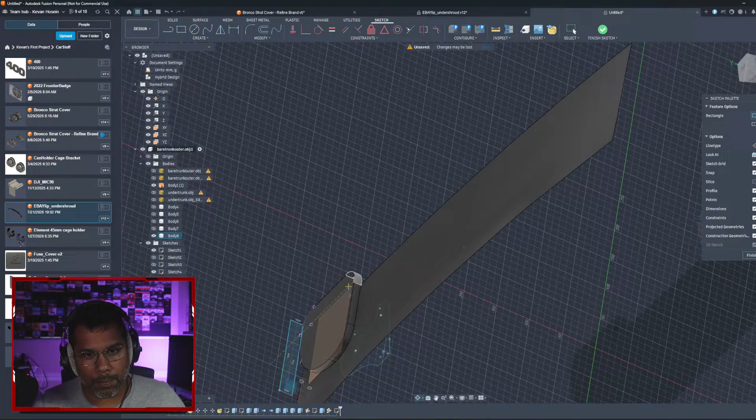Oh, you're supposed to see this—snapping thing is annoying. Okay, right there we go. We're in the middle.

Then okay, much easier. Let's project this shape. So we project the top on there, then we hide the object. Beautiful.

Now, with that, we can sketch our uprights to grab the pylon. Quick and dirty, quick and dirty. That was a snap, I don't want it to snap. See, yeah, that was a snap.

Okay, right, finish that sketch. Show back our top plate. Right, and here we can extrude this way, 5 mils. We're not joining—there's a new body. Okily dokily.

And we actually cut and hide—I'll do that after, but semantics. So now we have the base plate for our wing blade, our pylon. Alright.

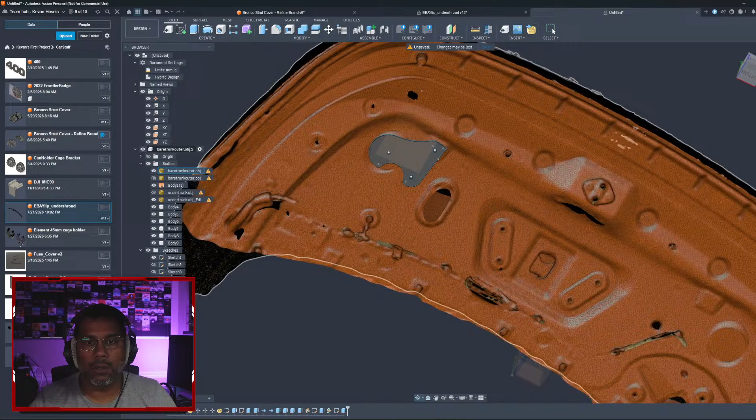Off camera, I'll work on this, and the next stream I'll have to figure out what I'm going to do with it, but I could catch you all up and have a better design. But I think this is the general concept—what do you guys think? So we have our hatch, and then we have our under trunk, where we have a nice strong bottom plate.

That we're going to drill through. So technically what we could do is hide that, because we just removed these in order for us to get our plane.

That, and that. Control, E. Oh, they're all different lengths, so it's being a pain. Enter. No, 10 might not be enough. 20, extrude 20. Put our plate back.

Okay, and then we'll pretty much say, hey, riser, label plate. So I'm gonna have to be clicking randomly, and this just represents our bolt. So on our plate, we'll split using our bolts. 1, 2, 3. Cut that.

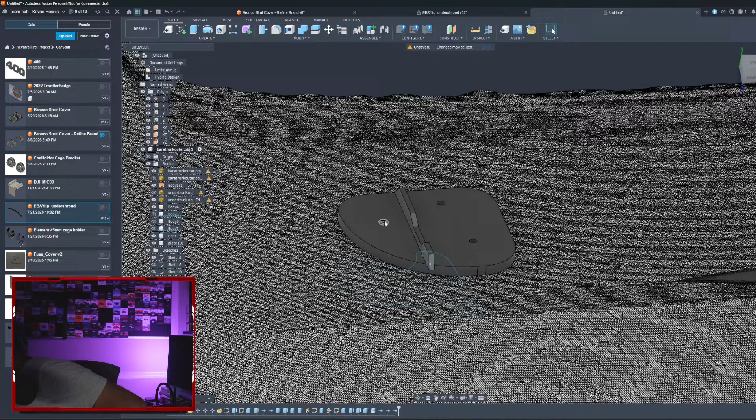So now we have technically our bolt-in surface. We'll bolt down. We'll use what you call it? Cap head screws.

So we'll get M6 size cap head screws like this. So big as cap head screws, and it'll countersink it. So we'll make these holes a little bigger than the thread to fit the actual barrel of the cap head screw, and just have it flush with the top plate.

So I think that's it for that, right? What do you think, guys?

A winner? We're gonna have to insert the bolt models. You see, I haven't done that. I need to do that, but McMaster-Carr does offer those free scans, and that is a good point. That would be kind of cool. Why is this not closing? Although, most of the times I get my bolts from Ace Hardware across the street.

But yeah, that's there. And then we'll have to bring in the model of the wing.

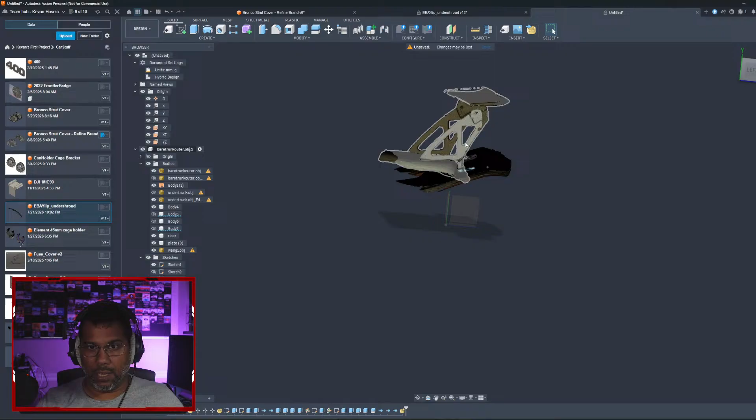I'll have to throw all this stuff. Oh my god, okay, just hit okay. Then we can move again. The heck. Okay, jeez.

Help me out here, model. 2 degrees? 2.5? 3 degrees. Yeah. Alright, and then move again.

And so many scans we worked in to figure out this project. Alright, so see, this will be a little on the inside, right?

This was on the hatch all the way on the outside, or form. So see this part of sheet metal here, which is nothing there, guys. You see why I'm going through all this trouble? This is kind of forward, let me move it back some. I was like, why am I buying this kit from this company if they're not developing a proper pylon, right?

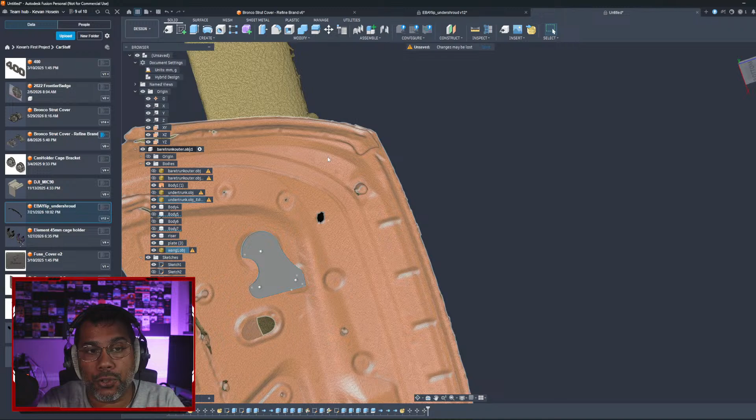Why put out a product that's this bad? Right? What they have to do, they have to actually cut here and bolt it to the outside skin, when this is taking hundreds of pounds of downforce. I don't get it.

Alright, and after I do one side, I simply have to just mirror. Look at this. Look at this magic. For the guys that are watching that don't normally model, look at this. Mirror that object by this plane. Bam! How sick is that, right?

And same thing, this bottom here, right? This is why CAD is so freaking cool, although I'm stubbing my toe and fighting through it.

Remember we were saying that past Kiewan should have worked a little harder on orienting stuff? Yeah, this is why. But you get the gist.

Oh shit, yeah, well, nope. But yeah, so yeah, that's not the right place at all because the shit's all skewed. That's why it's so important to line everything up. Goodness. But yeah, those two parts are symmetrical. Yeah, like right there, see, right there. Good, okay.

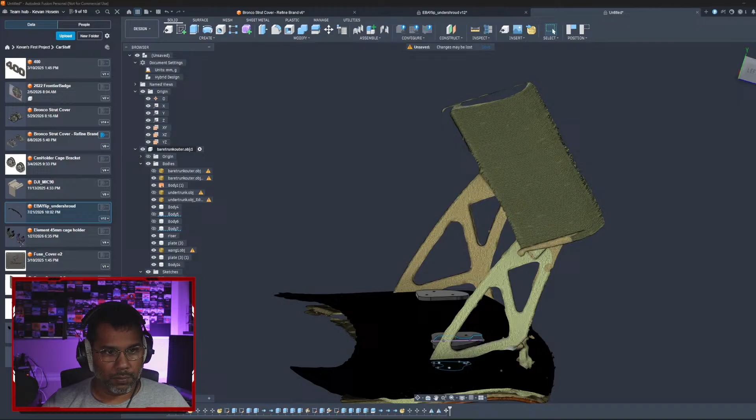Like I said, this is just a rough concept, but that's kind of what I'm doing. And then we will have to... it's so late, I was supposed to get off like hours ago.

Sorry, I have water. Like I say, we're just down and dirty here. And then just down and dirty. Edit smooth. Excuse me.

Of course I will do this a lot better, but it's just proof of concept. I'm looking at that shit. Woo-hoo, that's gonna look so sick! Oh my god, look at that! That's gonna look so sick.

Oh, Mirror made it easy. Yeah, Mirror definitely made it easy. Holy shit. Guys, oh my goodness, let's just throw this on the other side too. Position.

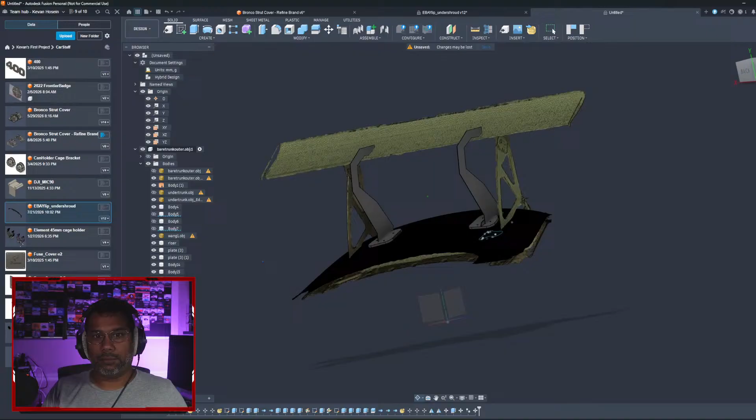Bro, let me hide that sketch. Imagine seeing that on the back of a 350 with a proper spec wing.

Man, I have to definitely get the alignment properly. We will be 3D printing everything in plastic before we do any laser cutting or milling. But shit, man, just looking at that, it's giving me tingles, dude. Tingles, like okay fuck, I need to end the stream, but god damn it. The endorphins are flowing so freaking hard right now.

Hold on, my guys. Hold on, my guys, right? So we have that there. Create a sketch. My dudes, my dudes. Fuck, it snapped, hold on.

Right? Look at this, look at this, look at this. Wham! Oh shit, it's in the wrong angle. It snapped badly. Bastard. Oh yeah, that is kind of skewed, ain't it? Shoot, I'll do a loft. I'll do a loft, I'll do a loft.

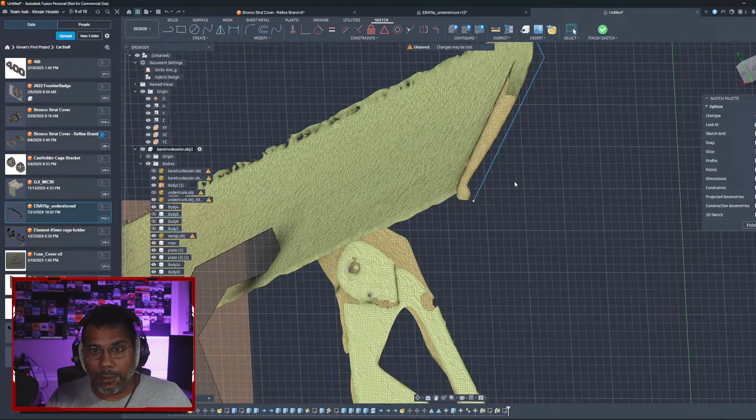Oh, dang it. Okay, finish sketch. Now we hide that construction plane. We grab this body over here, and we do a loft to this guy. We do a new body. Bam!

Oh shit! Now let's scan the wing. Wow! Imagine that hanging off the back of your 380. A proper built, reinforced track wing.

That's cool, guys. Fucking that sketch is showing, there we go. Alright, what do you think, guys? Come on, let's go in chat. That's wild, that is wild.

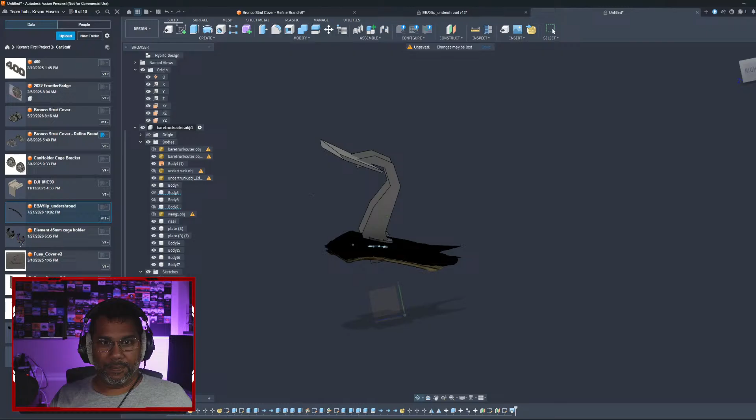I actually think an angular shape like that is kind of cool versus if we radius the ends. I don't know, we'll see. I kind of like how stealth-fightery the harsh lines are. That's kind of cool.

Oh man, I'm sorry for the struggles you guys had to endure, but I think the end result was kind of cool. Well, the end concept, we're far from a result. Very far from a result.